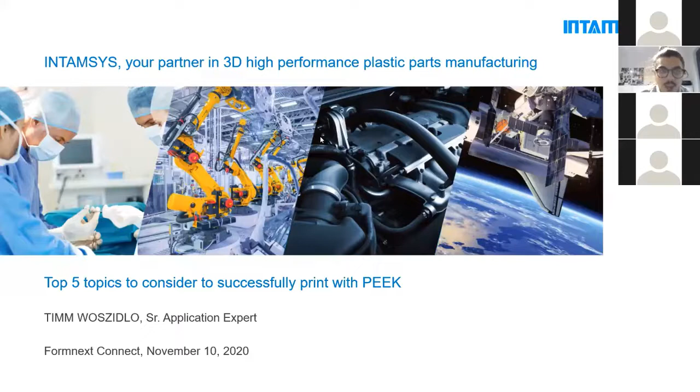I will discuss with you the top 5 topics that you should consider to successfully print with PEEK. So first, I would make a short introduction about INTAMSYS. Our slogan is create infinite possibilities to customize our future. We were established in 2013 and headquartered in Shanghai in China.

We are a world-leading company in innovative industrial FDM solutions, and we are providing end-to-end solutions from software, machine, materials, to give everything that is inside of the supply chain. We are the number one in PEEK printers in the market, and we have a full portfolio starting with a 6,000 euro printer up to 100,000 euro. We have an experienced core team with a lot of members with more than 10 years in engineering, from metrology, electrical engineering, and so on.

We have worldwide sales. We have subsidiaries in EMEA, in Stuttgart, in Germany, and we have also one for the US, and for sure we have an office in Shanghai. Our solutions are targeted to aerospace, automotive, electronics, medical, R&D, and any other high-tech industries that require high-temp solutions.

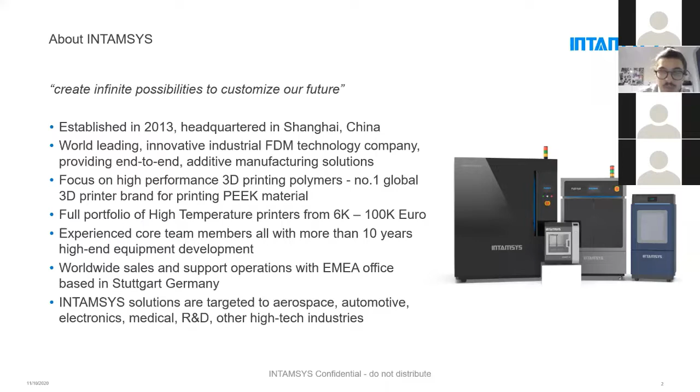As I said, we see ourselves as an end-to-end total solution supplier. So that starts with process software, with our own slicer INTAMSUITE, with our machine interface software INTAMSTOUCH, with our own materials, with an open material program, with certified third-party materials from well-known suppliers like Kimya, Polymaker, Huntsman, Victrex, SABIC, and way more. And for sure, we have printers, high-temperature industrial printers, in every class that is required in the market.

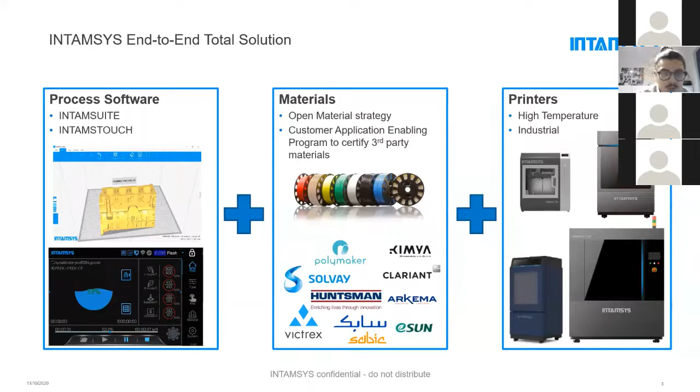Now I will speak about the top 5 topics that you should consider. So first, it starts with drying of your filament. Drying of PEEK is really, really necessary, and it's something that you must do. If not, you will not have success with printing. Even if you have a new spool, you should pre-dry it, as you don't know how dry it was when the manufacturer sealed the bag, and also a sealed bag is no guarantee of no moisture, as even the bags still let some moisture inside.

We do recommend 5 hours at 150 degrees Celsius. We also recommend an active dry chamber to keep the material dry during the print. So slightly heated, 70 degrees or better 100 degrees, depending a little bit on how long you want to print, and also on the conditions that you have in the environment. If you don't have this, you should place a sufficient amount of desiccant inside of the filament chamber to make sure that you avoid moisture uptake as much as you can.

When you are finished with printing, take your filament out of the printer again, put it in a sealed bag with desiccant inside to avoid moisture uptake as much as you can. And again, when you start printing, even if it's only 2 or 3 days later, re-dry the material. It will definitely take up moisture, and this has a big influence. And this is also what you see here in the pictures, that the material really starts to foam up. It gives you bad control of extrusion and also much less strength in the part.

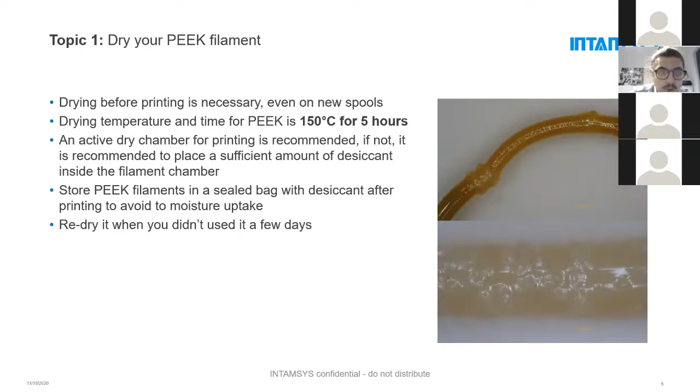Topic number 2. Start with a good foundation, build plate treatment. So to have success with printing, especially with FFF technology, it's very important to have good adhesion from your part to the build plate. This is why we have a strict guide with a specific glue to say, okay, if you follow this guide, you have good adhesion to avoid any failure. Due to the expensive material, we do recommend exactly following this guide to not lose any gram of material.

Gluing itself is very easy. You should apply 4 layers of glue. First, you clean the glass plate. Clean it only with water and soap. Don't clean it with special glass cleaners that may have a lotus effect. This can be negative for the adhesion between the glue and the glass plate.

And then apply 4 layers of glue. Between each of these 4 layers, you should wait 30 seconds to 1 minute so that the glue has a chance to dry. After this, your plate is ready for printing. And after printing, when you remove the print, you can clean the plate again and repeat the step of coating with glue.

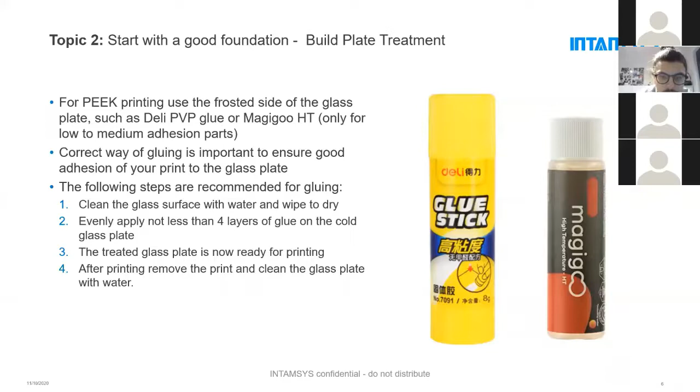To continue with topic number 2, we do recommend to print with a raft for any parts that require a low to medium adhesion or that are printed with small nozzles like 0.25 millimeter. To be honest, I'm not the biggest fan of printing with a raft, but on PEEK it definitely makes sense. Due to crystallization within PEEK, you can have bad adhesion, so it's good to print with a raft. Later on, I will speak a little bit about layer adhesion, crystallization, and so on, and then you may understand it a little bit easier.

The good thing here is when you print PEEK with a raft, you set the distance between the raft and the part to 0, which gives you a perfectly even surface on the first layer. You have no elephant foot, you have good adhesion, and even on small nozzles where it's very hard to get a perfect build plate leveling, you have no issues with printing. You can also play a little bit with the crystallization of the raft, which has a big influence on the adhesion between the raft and your part itself.

It's very easy to keep in mind. A higher fan speed, the parameter is called raft top fan speed, results in a lower crystallization, which gives you a higher adhesion between the raft and your part. And the other way around, a lower fan speed gives you a higher crystallization of the top layers of the raft, which gives you a lower adhesion.

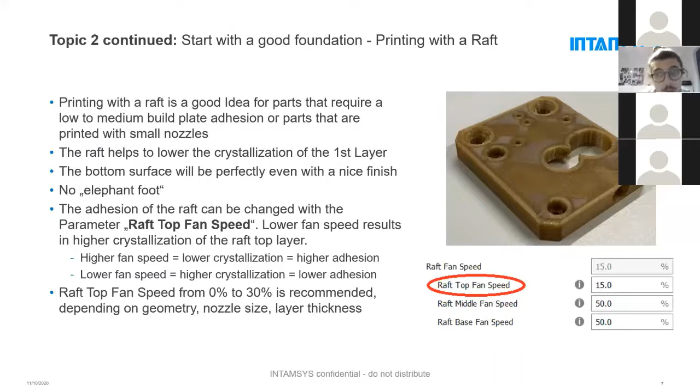One of the most asked questions is, do I print amorphous or do I print semi-crystalline? PEEK itself is a semi-crystalline polymer, which is very tough to print, mostly related to the semi-crystalline structure. PEEK has a very sharp crystallization point. When you start to melt it, you break up the crystallized structures, and when it cools down, it crystallizes again. The problem with semi-crystalline parts is that it's very hard to define when they crystallize or to have an influence on when they crystallize. And this is the trick with amorphous printing.

When you print with an amorphous strategy, you cool the parts a little bit down. You avoid too much heat in the part to make sure that the part does not crystallize. This gives you good interlayer adhesion. You have very good control over the crystallization, which results in very low deformation and low internal stress between each layer.

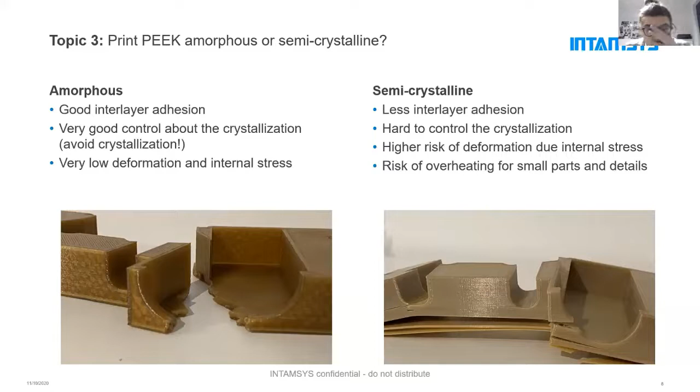Due to varying geometry, you have varying heat input on the part, which makes it very hard to control the crystallization perfectly. In the end this gives you a higher risk of deformation due to internal stress. Also, when printing with a highly heated chamber, you have the risk of overheating parts. So there's not only the risk of getting the parts too weak, there's also the risk of overheating them and getting small details very bad. Also, overhangs are worse. So our recommendation is to really go with amorphous printing.

Why? Again, you have very good control over the crystallization. That means you avoid the crystallization, which still allows you in the end to get a crystalline part. If you then anneal it, so tempering or post-treatment, then you have an equally crystallized part.

Overall, amorphous printing gives you very good dimensional accuracy, we speak about plus minus 200 micron. You have very good overhang capabilities; you can handle overhangs up to 60 degrees. And you have no risk of overheating parts. Even with very small nozzles on small parts, you get very good, detailed results. In the end, with FFF-based technologies, printing a detailed object of 1 by 1 by 1 centimeter with a 0.25 millimeter nozzle is already very hard, related to the technology itself.

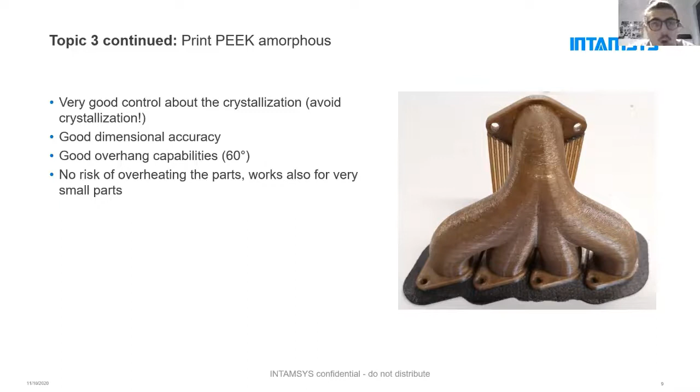If you then decide, okay, I will go with amorphous printing, and your print is finished, you should consider when do you remove your part after completion. First, it's very easy to say, we do recommend to remove the part in a hot state. If you don't remove the part in the hot state, you have the risk that your part has more shrinkage than the glass ceramic. And when you then still have adhesion from your glue, you definitely get a lot of shear force. And in the end, you can get broken glass plates.

So we do recommend to remove it in a hot state to avoid any high force to the surface of the glass plate, as the glass plate is very hard and slightly brittle. This is especially related to the Dely PVP glue that we do recommend, as the Dely glue still has a high adhesion at low temperatures.

Some other glues in the market, like Magigoo HD, which gives you a little bit less adhesion, also lose their adhesion at lower temperatures. So there is less risk, but there's still a risk that your part has too high adhesion to the build plate, and this results in a broken glass plate. And this is something that I would definitely avoid.

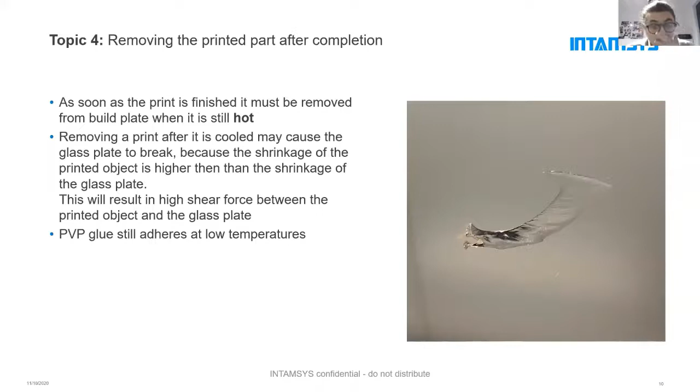As we print with an amorphous strategy, we discuss a lot about: do I need to anneal my PEEK parts? And there are 3 points that you need to ask yourself to know if you need to anneal or if you may not require that. The first is: anneal your parts when heat resistance above 150 degrees Celsius is required.

If you have an amorphous part and you go above 150 degrees, you have the risk that your part only slightly crystallizes. You definitely get deformation, while you have no control over how fast you heat it up and so on. So this is definitely a maximum for amorphous parts.

Second point, anneal your parts when you need to achieve the highest chemical resistance. Due to the increased density and the change of the polymer structure, a crystallized or annealed part definitely has less porosity in the structure, which gives you in the end a higher chemical resistance. Still, amorphous parts have a good chemical resistance, but definitely a little bit less than an annealed, so a crystallized part.

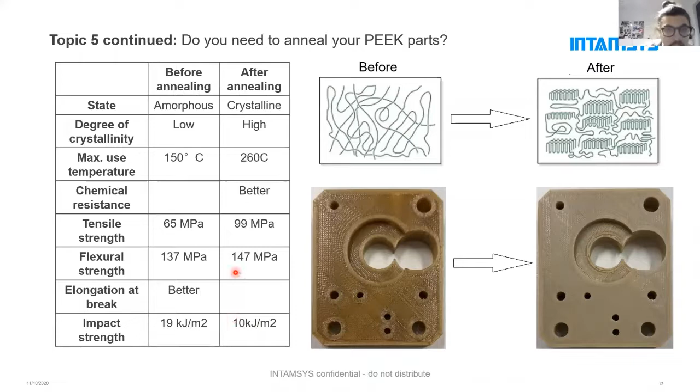One thing about annealing is definitely how to do annealing. And I have only one short slide for you. I could speak 2 hours about annealing, but what we mostly do, especially for sensitive structures, is to put the part in gypsum. So you mix up a gypsum slurry, put all parts within gypsum in a special container, dry this container, then heat it up first to 120, 150 degrees, then you heat it up to 200 degrees, then you cool it down to 150 degrees, then you naturally cool it down to room temperature, and then you wash it out. If you look back, here is one curve of how annealing looks like.

Especially the ramping is very important to get a consistent crystallinity. So slow ramping up and slow ramping down is very important for good annealed results. For the top temperature, we use 200 degrees, and as our start and finish temperature, 150 degrees, as this is still a little bit below the HDT, so HDT-A, where the part starts to get softened.

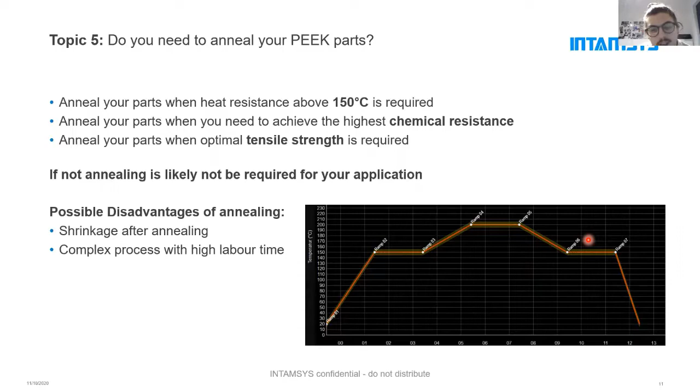There are other ways of annealing without gypsum, with sand or with salt, but in our opinion, they have a slightly higher risk of deformation. So this depends also a little bit on your part geometry and also on your requirements regarding accuracy of the part.

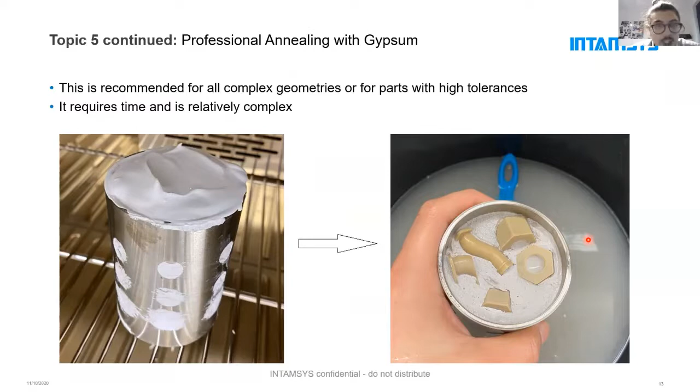Last but not least, I would like to give you a short introduction to our portfolio of printers. It all starts with the FUNMAT HT, the first desktop printer which was able to print PEEK parts. It's a 6,000 euro printer, so very affordable to get first experience, first hands-on with printing high temperature materials like Ultem or PEEK. Then we have the FUNMAT Pro 410, which is already a very industrial workshop-like machine with water cooling, dual extrusion, 7-inch touchscreen interface, a filter in the chamber, heated chamber, and all these features that you require for high temperature printing. The Pro 410 is priced at around 25,000 euro.

And then we have the Pro 610, which is our top machine with a big build volume of 50 by 60 by 50 centimeters, a build chamber up to 300 degrees, an automatic material changer, heated material chamber, heated chamber, and so on. And as we are focusing on industrial solutions, we have also the Flex 510, which is a printer mainly made to print elastomers on an industrial level within FFF printing.

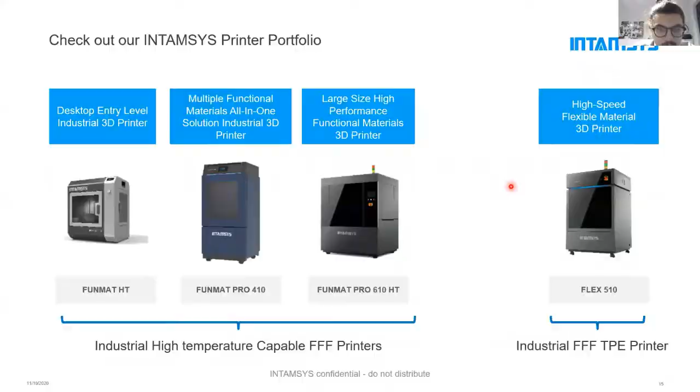So this was everything from my side. I hope this presentation helped you to get an understanding of how to print PEEK, especially to have good success with printing PEEK. I'm now open for some questions from you, so please use the chat, write your questions, and let us try to answer them.